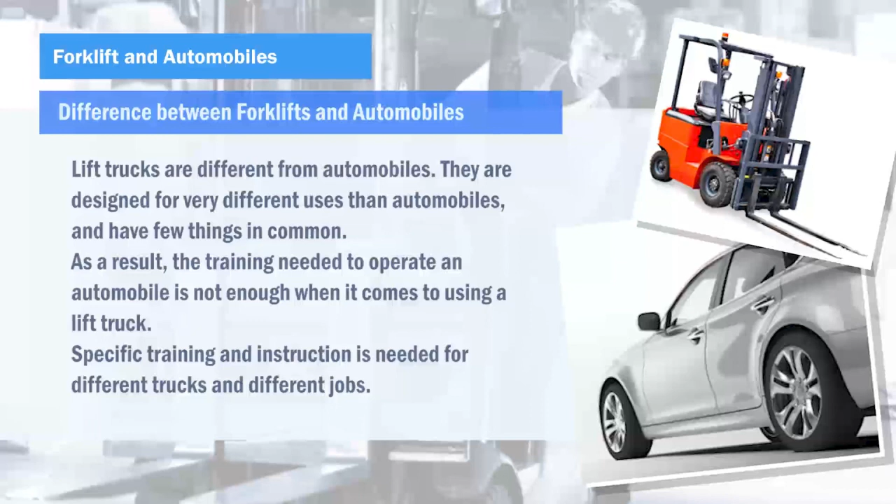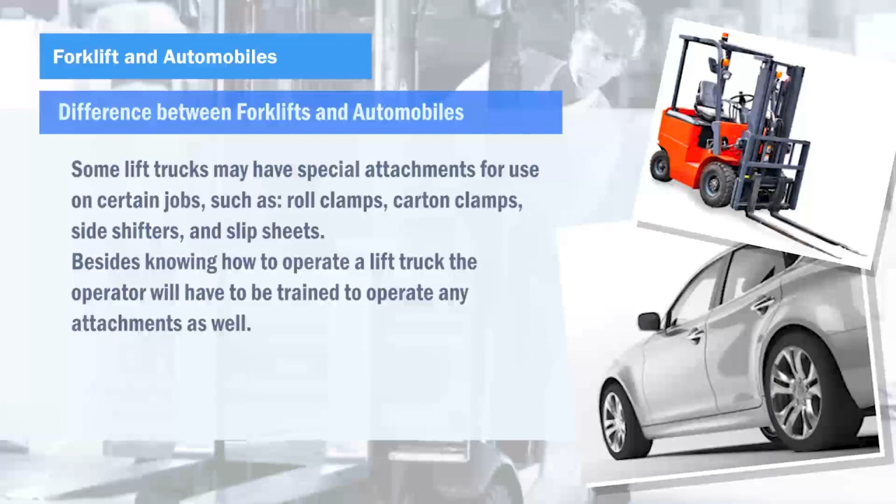Some lift trucks may have special attachments for use on certain jobs such as roll clamps, carton clamps, side shifters, and slip sheets. Besides knowing how to operate a lift truck, the operator will have to be trained to operate any attachments as well.

Hazardous conditions for forklift operation. OSHA and the National Fire Protection Association have created specifications for lift trucks working in hazardous areas. These specifications include special safety features on the truck that reduce the risk of a fire or an explosion.

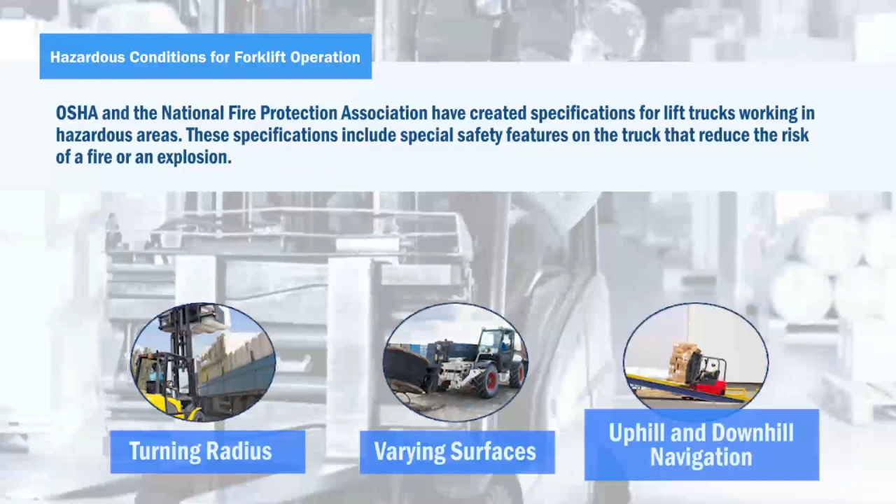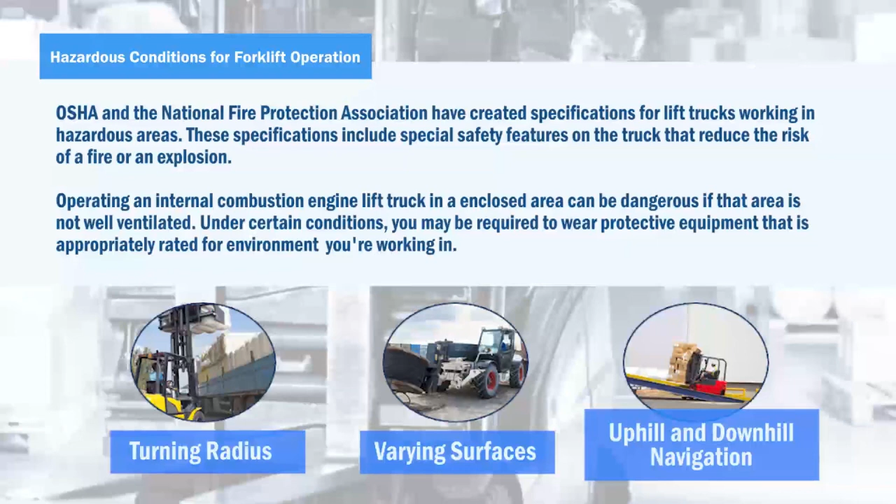Operating an internal combustion engine lift truck in an enclosed area can be dangerous if that area is not well ventilated. Under certain conditions, you may be required to wear protective equipment that is appropriately rated for the environment you're working in. Here are some potentially hazardous conditions you should consider when operating a forklift.

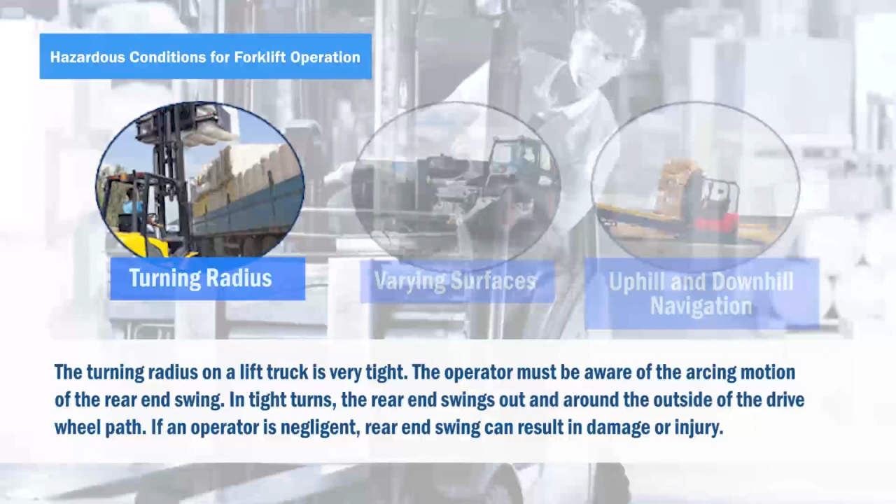Turning radius. The turning radius on a lift truck is very tight. The operator must be aware of the arcing motion of the rear end swing. In tight turns, the rear end swings out and around the outside of the drive wheel path. If an operator is negligent, rear end swing can result in damage or injury.

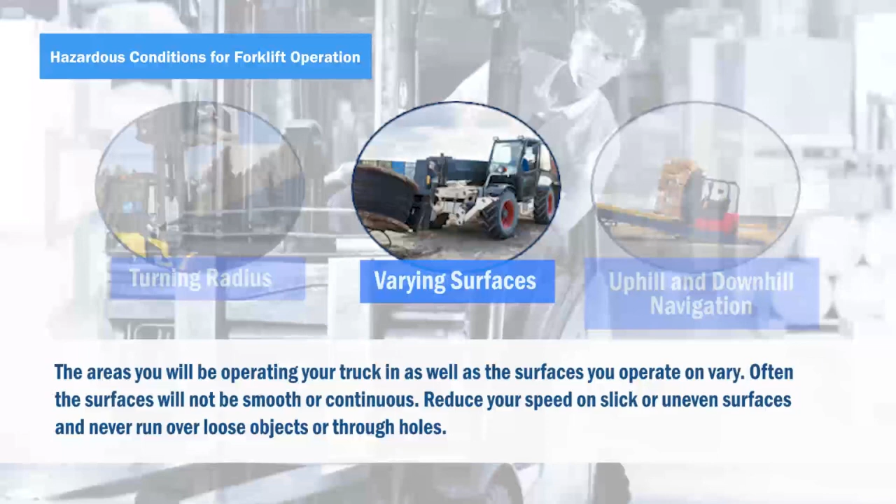Varying surfaces. The area you will be operating your truck in, as well as the surfaces you operate on, vary. Often, the surfaces will not be smooth or continuous. Reduce your speed on slick or uneven surfaces and never run over loose objects or through holes.

Uphill and downhill navigation. Downhill and uphill grades, such as a ramp, require extra caution. If traveling empty, regardless of direction, always drive with the truck's forks pointing down the grade. When moving a load, regardless of direction, always move with the forks pointing up the grade.

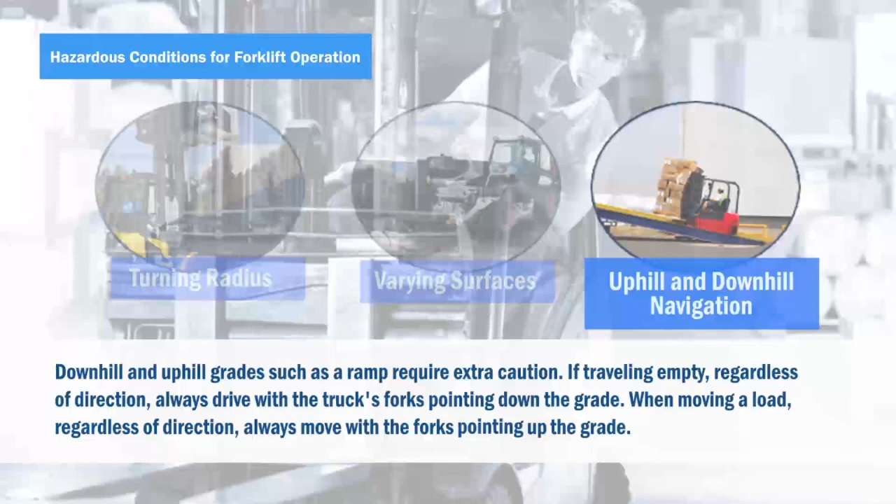Working around pedestrians. While working around pedestrians, make sure you maintain a clear view of the path of travel, observing other traffic, pedestrians, and obstacles. Yield the right of way to pedestrians. Never give rides to pedestrians.

Never assume that pedestrians are aware of you. Sound horn, make eye contact, and only then pass a pedestrian. Never allow pedestrians to move under a raised load. Park the truck away from pedestrian traffic.

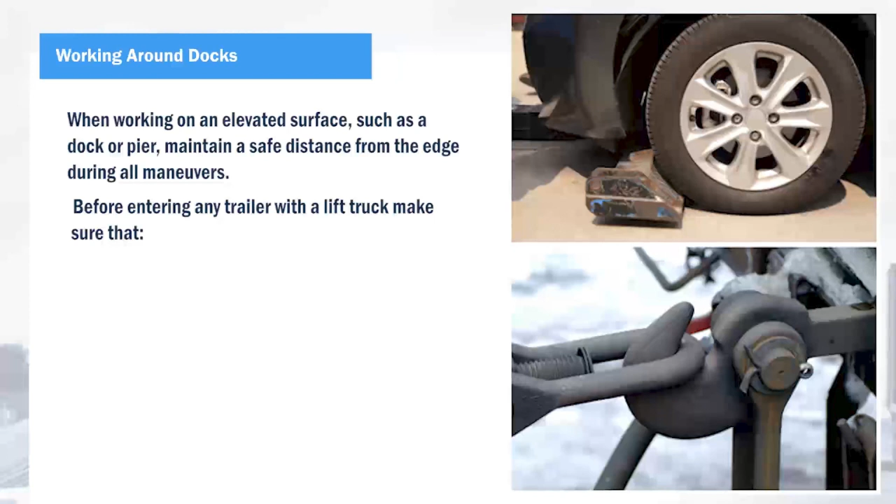Working around docks. When working on an elevated surface such as a dock or pier, maintain a safe distance from the edge during all maneuvers. Before entering any trailer with a lift truck, make sure that the trailer or rail car can handle the additional weight, and the trailer or rail car is secure against movement.

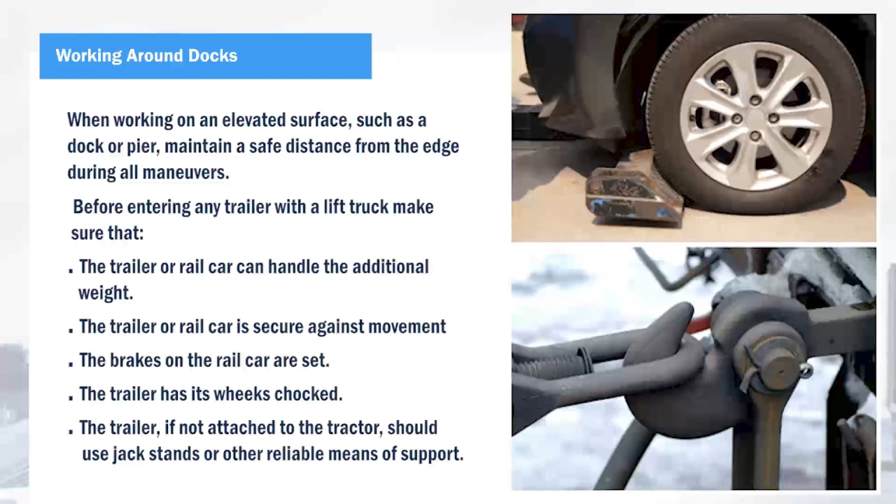The brakes on the rail car are set. The trailer has its wheels chocked. The trailer, if not attached to the tractor, should use jack stands or other reliable means of support.